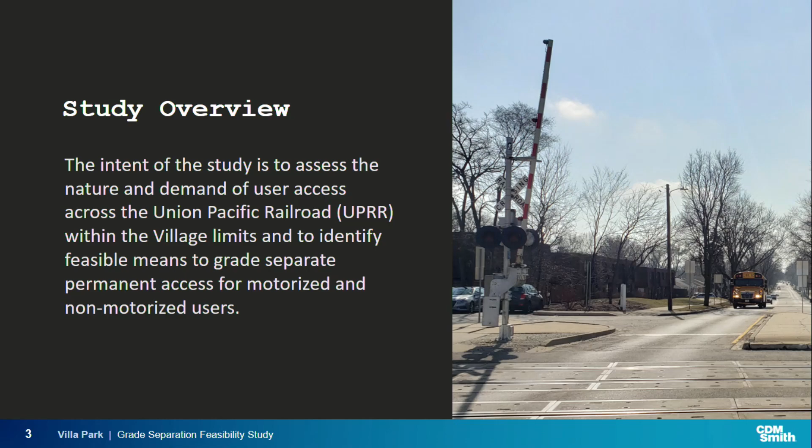So we kind of talked about the study overview already, so thank you, Mike. And then we'll jump right into the schedule.

Back in April, we did bring to the Committee of the Whole a presentation of the feasibility study, starting with a kickoff meeting. We also opened up the public survey at that time. We then met with Villa Park representatives, stakeholders internal to Villa Park, and staff, and talked over some of the results, not only of the study, but a little bit of the impacts of some of the alternatives. So we had a little bit of internal discussion before we really got moving on the concept development. We've been refining the concepts over the summer, and now here we are to talk with you, get some final input, and then incorporate that into our final recommendations.

So, as part of the feasibility study, we really are looking to understand what's feasible, recognizing best utility, recognizing major needs, some of the issues, environmental issues, and so we'll walk through some of those at a high level.

One of the first things we did was look at the local traffic profile. There were 4 alternatives, or 4 grade crossing locations, we looked at: Westmore being one, although it's not currently a grade crossing at this time. It was an opportunity for us to see if that had any more benefit than the other locations, also shown here: Addison, Ardmore, and Villa Avenue.

So with Westmore, obviously not a local crossing, it has a two-lane cross-section on the north and south of the tracks.

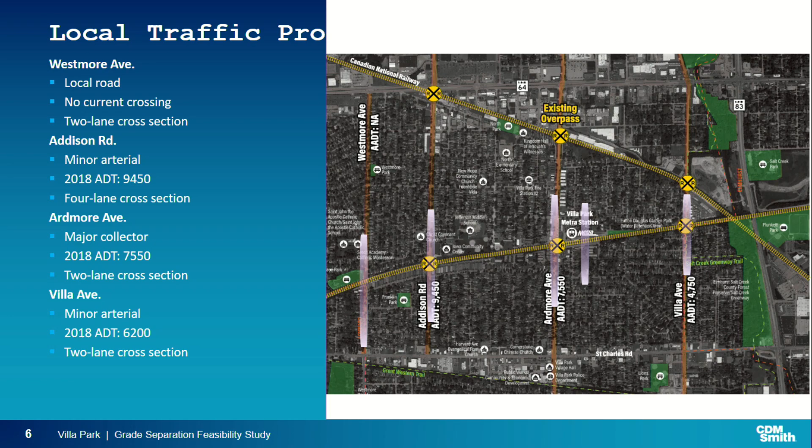But Ardmore also had a little bit lower traffic than Addison, a 2-lane section, again, which makes sense. And then we looked at Villa Avenue as well, all part of our scope here. Villa had the lowest average daily traffic of any of the crossings we evaluated.

So as we understood where the traffic sat, we started looking, no pun intended, at the train crossings and the average hours of delay at each of these locations. This is average delay per weekday. Back in 2018, we started looking at this information.

There's over 100 trains per day in 2018, 59 Metra trains in 2018, but it's still right about the same right now that you're experiencing in 2023.

With that, we're looking at almost 160 hours of delay for motorists overall, not per motorist, but total hours of delay. For Ardmore, it's 130 hours a day, and Villa, again with the lowest traffic volumes, has the lowest hours of delay. But still pretty substantial delay, which I'm sure you've all experienced at some point driving through the village.

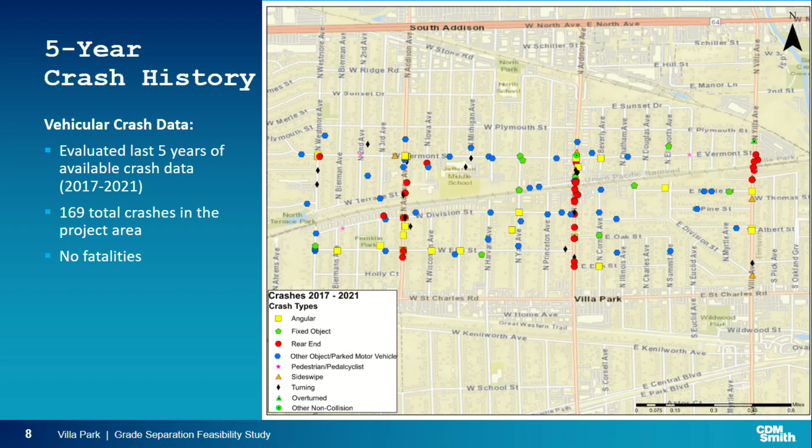We also took a look at the environmental overview. We recognize that there's really no critical habitat for any threatened or endangered species within Villa Park. We did not see any historic or architectural resource that we need to be concerned with, and there was a low risk of flooding at the crossing locations.

What we did see were some potential environmental issues that may come up if there were an improvement. At Addison, there's public space, the Iowa Community Center, and that property is considered open parkland. So if we were to do any impact or improvements there and need to take some of that property, we'd have to work with a mitigation strategy to accommodate that improvement.

At North Terrace Park, also that 4(f) designation over at Westmore, if that was going to be an option, we'd have to look into some sort of mitigation if there was going to be a real impact to that property.

And then we did recognize that there is a LUST site, a leaking underground storage tank, around the Ardmore crossing. Again, something to be mitigated, just something to be aware of as you move into the next phase. But no red flags. There was nothing obvious saying this is not a feasible alternative at any of these crossing locations, so that's good.

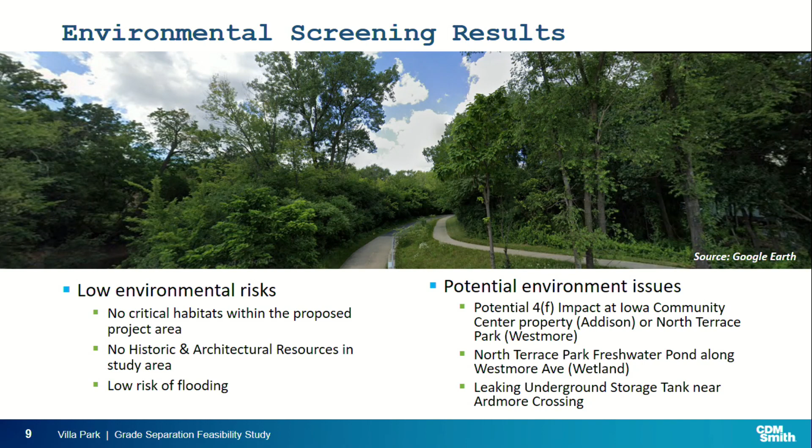So we talked a little bit about public engagement. We met here before in April. We worked with village stakeholders internally in May, and now we're back again to present the rest of the findings. From that online survey we discussed here, we got 150 responses, which is really pretty good in my mind for some of the public engagement I've seen with these studies.

Ooh, I keep hitting buttons.

From that, we asked a series of questions, and what we really came up with was that top of mind is response times. Emergency response times is a major issue involved with not having a grade separation in Villa Park. Reliable travel times, safety, and again delay, both pedestrian and motorized travel, was obviously something we would have thought we'd see, but it showed in the results. And then a common theme was improved access, both for community destinations as well as north and south travel.

And then we did hear pretty resoundingly that pedestrian crossings are really key for many people, particularly riding Metra trains. There were some issues with trains loading or unloading on opposite sides of what they're anticipating. Once the train comes, there's no option to be able to cross over. So people were saying they'd considered, or typically drive over to Elmhurst or another Metra station to have that reliability, recognizing they'd have an opportunity to cross tracks should that switch.

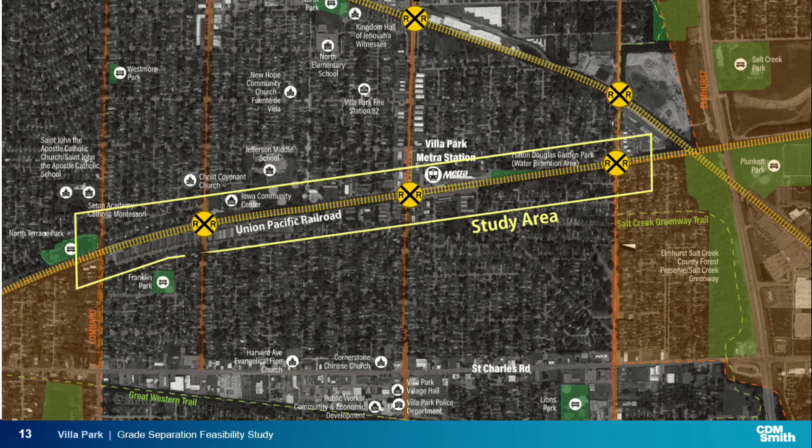So once we started looking more at the alternatives, I'm showing you this map just to show again, Westmore was under consideration. After the meeting we had with the village staff at the internal stakeholder meeting, it was decided that Westmore, not being an existing at-grade crossing now, really didn't make too much sense to carry forward. So it was dismissed from consideration moving into an overpass or underpass alternative. So then we're left with the three major crossings at Addison, Ardmore, and Villa. I'll note, because we did do motorized and unmotorized, and I'll get into this, not necessarily separating a grade or pedestrian-only grade separation at Ardmore, but recognizing that the Metra station made more sense to provide that pedestrian-only underpass. So I'll put that out there, but again, the three crossings we're looking at.

So we'll start talking about the motorized alternatives and some of the considerations. Obviously, overpass and underpass are really our options for the locations. Keeping in mind, underpasses typically tend to be more expensive, particularly under railroad crossings, mostly because that structure for the railroad bridge is so significant that it's just more costly to make that type of improvement. There are some pictures on the right side you can see there, the overpass on top and the underpass at Belmont. Underpasses also, though, typically have less impact to properties and access because you don't need that much clearance to get underneath the railroad bridge for the vehicular traffic.

It's usually around 14 feet for clearance. You've seen the clearance signs above bridges a lot of times, 14, 6, 15 foot. So there's not as much grade differential you need to get underneath that to get that clearance. Unfortunately, or just a matter of fact, when you have the overpass options, the overpass clearance requirements over our railroad tracks can be up to 25 feet, even 30 feet. So you really have to get that road up and over to allow for the appropriate clearance for the railroad or for the trains. That's where you'll start to see this, I'm just laying this out so you can keep it in mind as we look at some of these pictures coming up. And again, we're working with the railroad. I'm not sure how many of you have had interaction with railroad and trying to work with them, but they have long lead times on coordination.

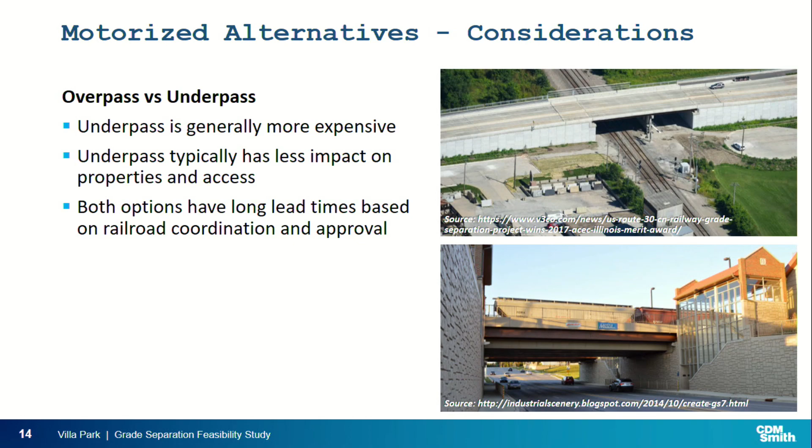So it's something to keep in mind if this is something you want to continue to pursue. Starting that coordination and that coalition building with the railroads, letting them know this is something that's being considered, is a really good idea. So putting that all together here.

Looking at the roadway sections, I mentioned it briefly in the traffic profile. At Villa and Ardmore, again, it's a 2-lane roadway. I know many of you know this. At Addison, it's a 4-lane cross-section. In the motorized alternatives, there will always be accommodation for bicycles and pedestrians for non-motorized travel along with that motorized crossing. So we'd always have some sort of a side path to allow for all modes to use that crossing.

When we get into the pedestrian only, I don't have an image up here, but we used a 10-foot walk path, which is pretty substantial. A typical sidewalk to be ADA compliant, Americans with Disabilities Act compliant, would be about 5 feet. So we're doubling the size of that just to be a little bit more conservative on any kind of impact that we would have with those underpasses or overpasses in the pedestrian. But again, something that we can start to refine as we move forward into the next phase.

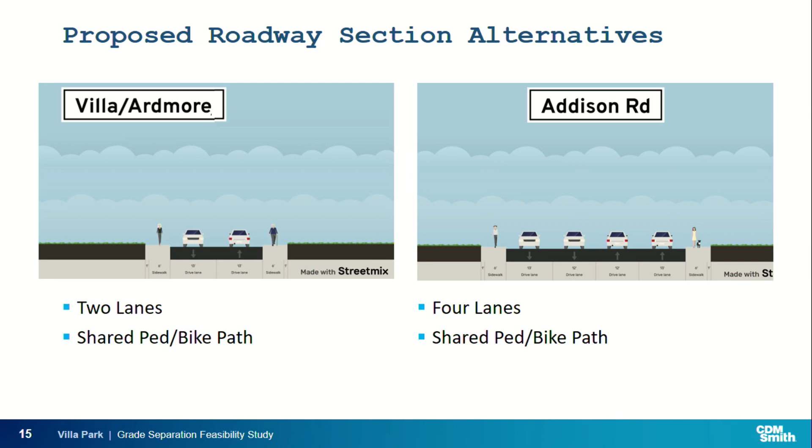So as we talk about motorized, again, these are the sections we're looking at. So we're going to start looking at the impacts and the benefits. On this next slide, again, motorized only here, with the accommodation of ped and bike. But I'm specifically talking about the grade separations for motorized vehicles.

I'm showing you this legend, and the legend's on each of the next slides, but I want to point out, impacted parcels does not mean that it's a property take. It could just mean that we might need a little bit of right-of-way to put in a retaining wall. It might be an impact to the access. We may not touch the property at all, but once we block the access, now it's an impacted property. So when you see some red shaded parcels, it seems bold, but it's just a comparison between the underpass and overpass options at each of these crossings. So with that lead up, here's what you'll see.

So this is at Addison Road, again, motorized crossing. On the left side is the overpass, and again, I talked about that clearance we have to get over the railroad tracks, and so you can see where the roadway needs to take off to gain that elevation to get up and over the tracks. And again, the red is just an impacted property, not a take, or acquiring necessarily.

The blue dots are the access or driveway impact, and then the larger green dots reflect where we are impacting a road crossing, where we would have to cul-de-sac or something like that in order to allow this alternative to be put in place. Again, this is a very high-level graphic. It's just more to get a sense of what we were talking about here.

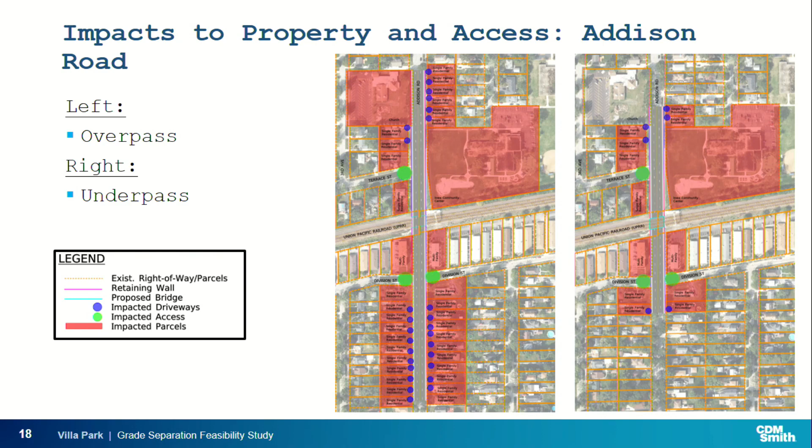Any other questions while we're here? No? Okay.

I'm going to keep my hands behind my back.

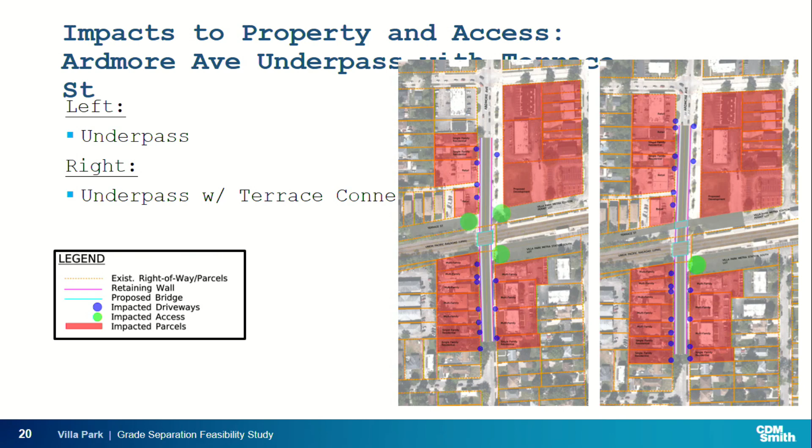Less driveways are impacted. At Ardmore, because there is Terrace Street on the north side, we did do a separate evaluation just to take a peek at that. Again, here you'll see on the left is the underpass, same as what we saw on the right side on the previous graphic. But here you can see if we kept the, and I apologize, the formatting here has not translated well, but it does say the terrace connection.

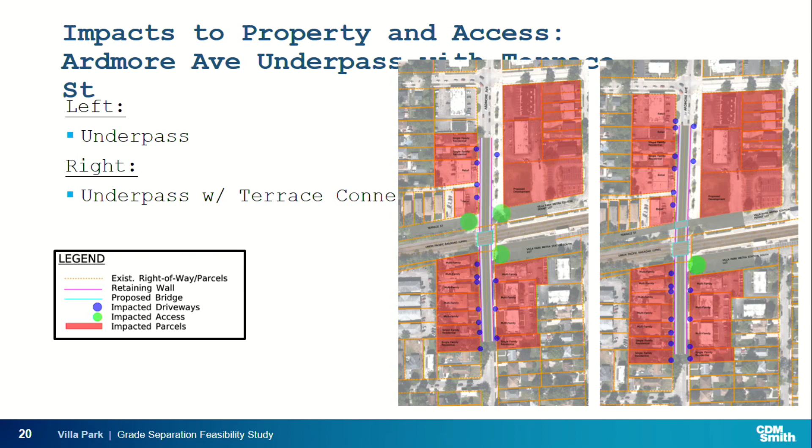And so we provided an additional structure for Terrace on the north side of the tracks, allowing that access to be maintained. So that structure, or where you're able to come back up underneath the overpass, is pushed a little bit further north, so you see a little bit more impact to the properties on the far north there. But it would be an option that might maintain some access for the proposed development in the northeast quadrant there. Just something that was brought up during our stakeholder meeting, so we kind of investigated at least for impact.

And then moving to Villa here, currently Villa has a pretty decent elevation difference already. The roadway already rises to meet the crossing location, the railroad tracks there. There's already a bit of a retaining wall. So in order to provide the overpass on the left, that elevation gain really comes back pretty far. So it's a relatively intense impact to Villa Park properties, both north and south.

And then on the east side, you'll see that there's the underpass option as well. Again, much less impact, but again, we're closing that access on Beach that does provide access to many of those single-family properties there on the southwest quadrant. So, are there any questions on the motorized before I move on to the non-motorized?

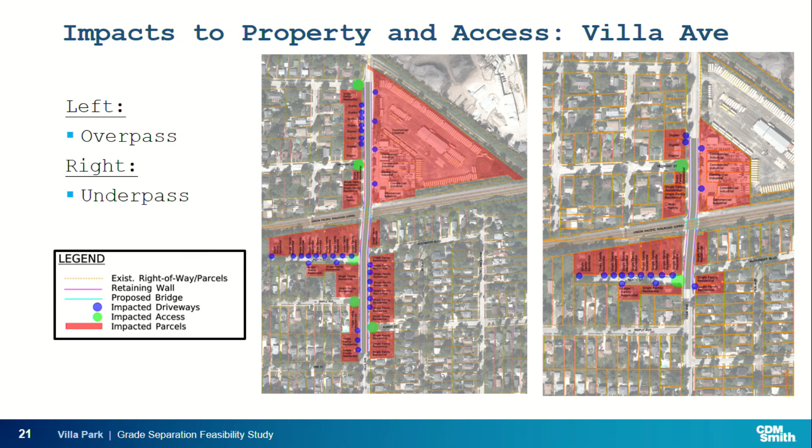There's only one way to get to Beach right now? Is that correct? It's not a dead end? Correct. It's a dead end? Beach is a dead end. Yeah, okay. Again, that's something that could be reviewed at another point, just to figure out maybe you can connect it somehow through to the next south street to provide that access there.

All right, then we're going to move into the non-motorized alternatives. A little bit different legend here. Same with the impacted parcels, same comment. It could just be that there's a bit of a take. So the picture showing here is really what I'm calling switchback ramps, where you really gain the elevation by switchbacking. Instead of having one long ramp, you just switch back. You can also provide stairs.

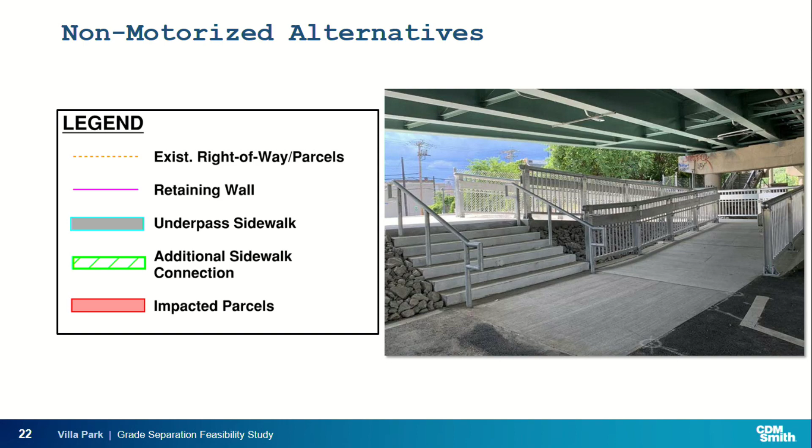For the examples you'll see here, we're using the switchback example to really show the impact to any of the parcels. Again, very high level, and just to give us a sense of what the impacts would be. We can tweak that. There could be a stairway and an elevator. That's a consideration that could move forward instead of having these ramps. When you see some of these impacts, you'll understand.

Again, even though it's a pedestrian and bike-only crossing location, you still have to gain the elevation clearance distance over the railroad. So again, you're still going up quite a way to get that access, and it may not be as attractive as using an at-grade crossing for pedestrians and bikes.

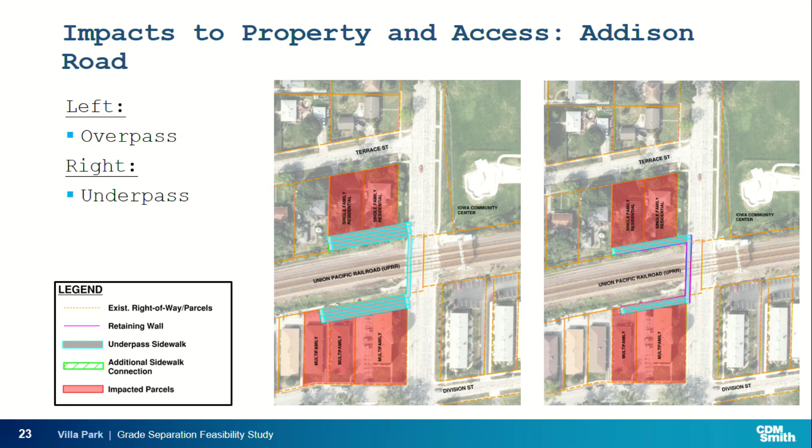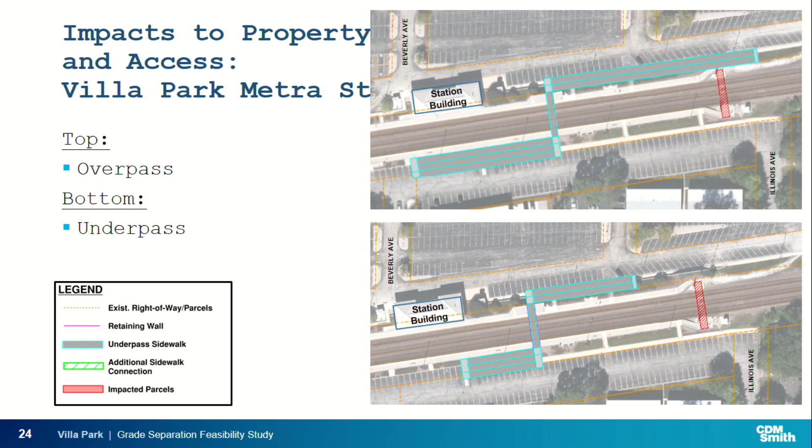As part of this, you'll see on the right side of the graphics, both underpass and overpass, something that would make this more attractive for funding options, for railroad approvals, is to eliminate the at-grade crossing currently there for the pedestrians by providing that underpass. So it's kind of a, hey, if we close this, it would eliminate an at-grade crossing. They may look more fondly upon that and maybe be a little more supportive of this effort. So just something to keep in mind.

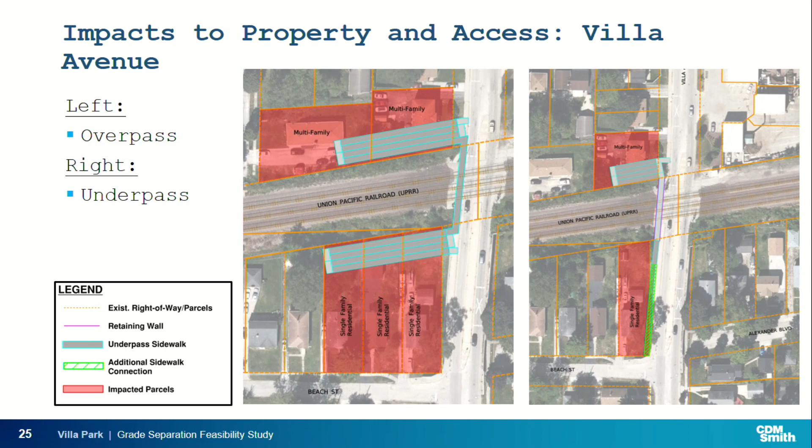Bless you. Excuse me. So for all of this, we started to base our evaluation criteria not only on some of the things that we looked at for the existing conditions, like the environment, the traffic, some of the crash data, but we also took into consideration what we heard from the survey, and also what we had heard with the stakeholder meeting with the Villa Park internal stakeholders.

So we looked at business impacts, we looked at some of the on-street parking impacts in particular. Utility impacts are an issue, makes the project a bit more expensive when you start having to relocate utilities. Obviously, cost is a big factor here, more for just the planning and trying to understand where funding opportunities may lie. And then also even potential railroad acceptance. So just all kinds of things that we considered.

We kind of summarized it, I'll walk through the bullet list. In the end, we put it to a color-coded where these things lie, a little bit easier to digest, but I'll run through these. We talked about it a little bit with Addison. This had the highest daily traffic volume, so you'd be accommodating more traffic if we were to grade separate that location. Also has the highest recorded delay.

It looks good on grant applications to show that it's got that delay, but to be honest, we have a lot of grade crossings in the Chicagoland area, and our delay is a lot higher than a lot across the nation. So all of these are very high delay relatively, competing for dollars at the Federal Railroad Administration level.

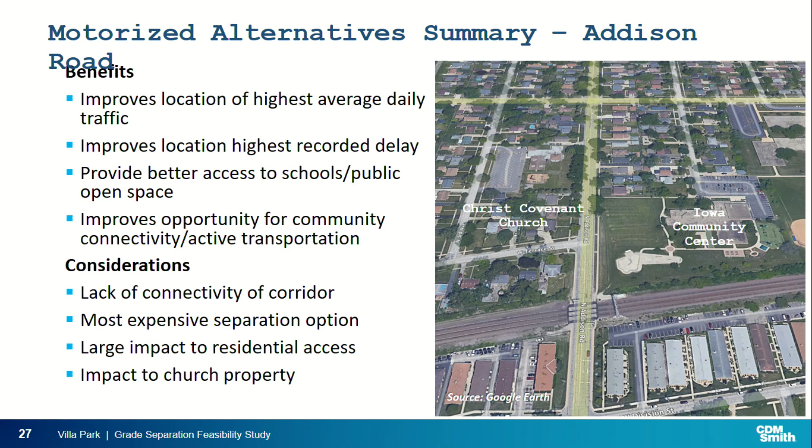It's also one of the most expensive grade separation options just because it is that 4-lane section. Either way, if you go over or under, it's just a larger cross-section that you need to accommodate for infrastructure. This also has a large impact to residential access, more parcels in particular than, say, the Ardmore option. And there may be impact to the church property. Again, just something to be considering.

We look at Ardmore, there is that connectivity from North Avenue to Roosevelt on the south. It's more centrally located in Villa Park. There's an existing grade separation to the north here as well, which allows a little bit more reliability for EMS. While that north crossing may not be blocked as much as we're experiencing here on the UP line, it still shows a positive benefit for emergency response times when you start providing that story to funding givers.

And then obviously the proximity to the Metra station may be a benefit here. Again, with the issues of trains on either side, even being confused as to which side you're supposed to board on, maybe having that motorized underpass there would benefit, maybe even bring some economic development.

I talked about the emergency response, and then this also has the lowest parcel impact of any options, both the overpass and the underpass. There are some multifamily properties on the south side that, while it's only one parcel, there might be more impact to residents. So again, something to consider, kind of a balancing. There also might be some impacts to the development that's already planned for the Eco Terra on the northeast corner.

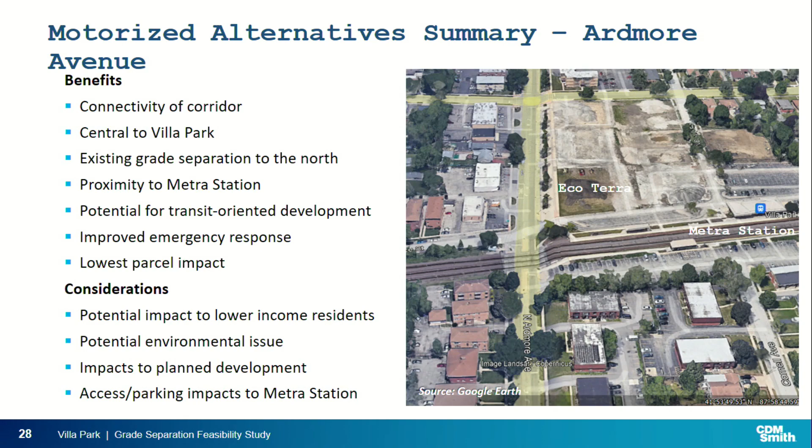Moving to Villa, again, we have the connectivity. There's a great opportunity here to improve the connection for the Salt Creek Trail. There's less benefit overall here, just when we look at how the Metra station is used and maybe even how Addison would be used with the access to the public space on the north side of the tracks. We did not take counts for the use of Salt Creek. That would be something that should be considered in the next phase to really understand that impact. But overall, with the criteria we looked at, this provided the least benefit of the alternatives.

There's also high residential impact here for over and under. Again, that grade elevation difference between the roadway and the current railroad, it takes a lot of effort to get up and over for an overpass. Here we also had the lowest daily traffic. And this also is pretty close to Illinois 83, already grade separated, so if you're looking for the benefit for emergency response, it may not have that much of an impact based on having the opportunity to take Illinois 83. And there were several more utility impacts at this location.

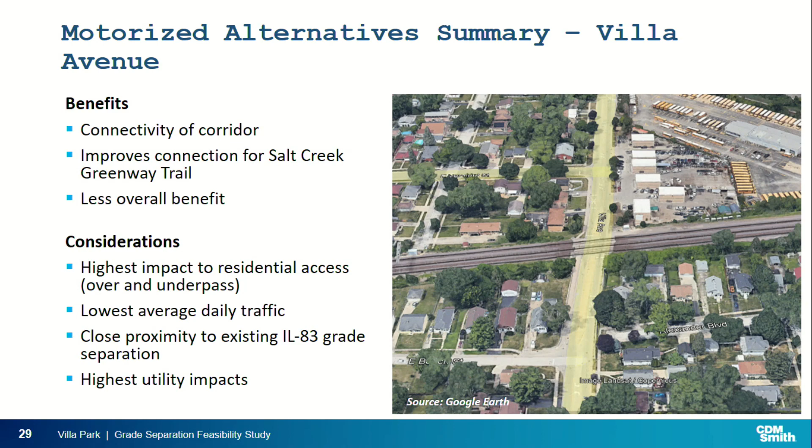All right, non-motorized. We're getting there, guys.

We're getting there. All right, so the non-motorized alternative summary here, we're talking about Addison Road. There is some benefit here if we provide a pedestrian and bike-only crossing, a grade separation here. Could provide better access to the schools and public open space, and again, that opportunity for more active transportation and connecting the community. Some considerations here. At Addison, the Metra blockages, so the 60 trains per day that are Metra, may not block this location as frequently as we see at Ardmore.

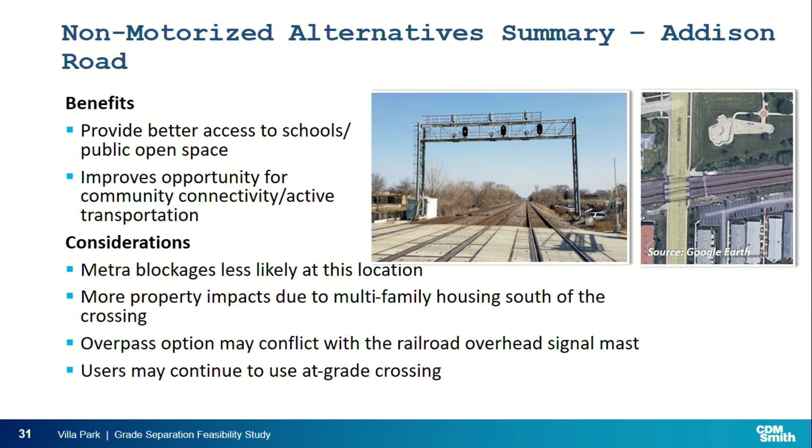And based on the length of those ramps to get over, at least what we're showing right now in the concept, users may still continue to use that grade crossing. So if you put the investment in there for an underpass or overpass and it's not being used, kind of defeats the purpose. So just again, some consideration.

Now when we look at Villa Park, there's a lot of benefit here. We talked about the riders being able to cross to one side or the other, depending on where the trains are. You've got the improved reliability, might attract more users to the station, might improve some economic development there, and then eliminates, at least for the pedestrian and the bike only, issues with Metra blockages there.

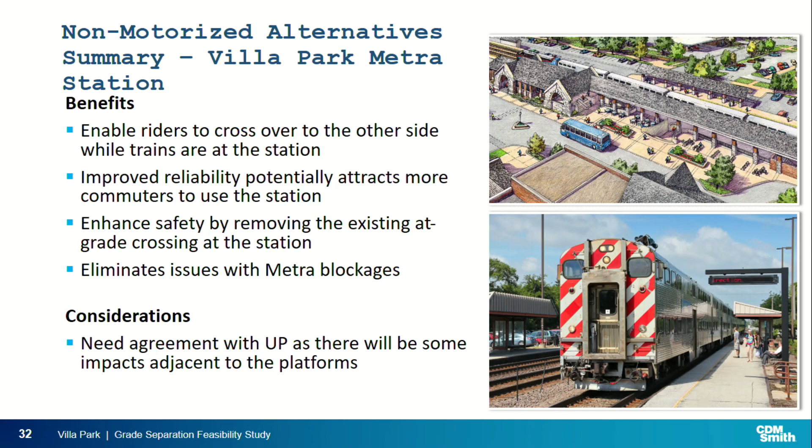And considerations here, there may be some impact to the platforms based on trying to provide that overpass or underpass. So again, you're going to have to be coordinating with the Union Pacific Railroad anyway, but just again, something more to talk with them about.

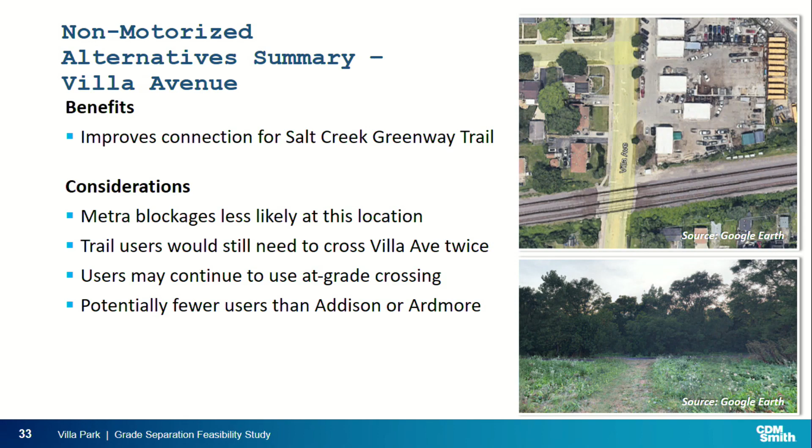And then Villa Avenue, again, we talked about the benefits. This would be, again, the pedestrian and bike only. Would improve the Greenway Trail connection. I know there's an ongoing study currently that's recommending the west side of the street to improve that. So there still would have to be some crossing of Villa Avenue for those trail users, even if we provided this underpass or overpass here. And again, potentially fewer users, something we would need to verify in the next phase of the project, as far as counts of pedestrians and bikes.

Okay, easy bunch here. All right, before I do that, you ready for our initial recommendations? If you couldn't tell by my tone of voice while I described these locations, based on what we've seen for really the utility and the benefit for motorized crossings, I think you get the best bang for the buck at Addison or at Ardmore. I don't know that there's enough there yet to really determine.

I think the next phase, which you would go into next, would be like the Phase 1 or the NEPA process, and that's really where those two alternatives would be explored in more detail. I know some of the concerns that we'd mentioned before were induced demand. I think that came up at the previous meeting of the whole. If we do provide a grade separation at one of the crossings, would that draw more traffic to that street to use the grade separation?

And that's something that would have to be explored. There'd have to be some projections, comparing it to other improvement projects in the region to see how that kind of induced demand or change in travel pattern would happen. But something to consider, and maybe that would be the deciding factor for Addison or Ardmore. All of these options would improve safety, and that would be recognized by the Illinois Commerce Commission, ICC. The railroad would appreciate some of these improvements as well, just eliminating some of their at-grade crossings.

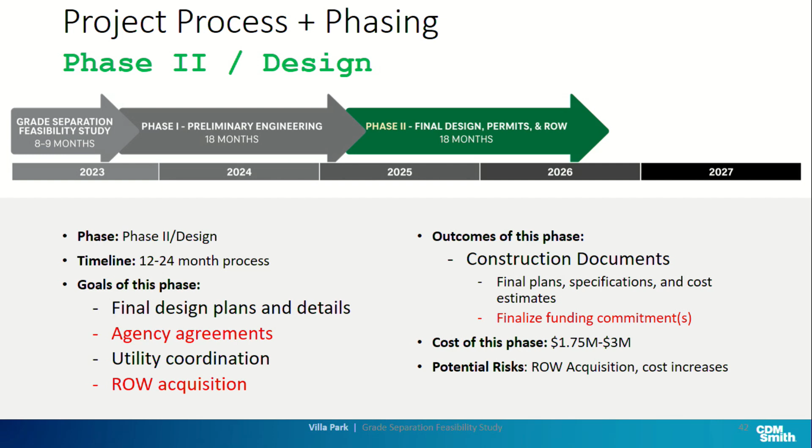Then we go into construction as the 3rd phase. This timeline is probably pretty aggressive, depending on what type of alternative you'd go with - this could be maybe 2 to 3 years for construction. Again, we have the cost of this phase as 20 to 25 million.

You saw some of those - this was originally what we'd shown back in April. Doing a little more investigation and looking at some projects regionally where they fell as far as cost for an over or underpass, those estimates are probably more in line: anywhere between 7 to 20 million for a pedestrian-only, ped/bike only, and then 20 to 60 for motorized. No extra zeros, just higher.

It seems a pretty aggressive timeline, because from what I've seen, it's usually you're looking upwards of 10 years from start to finish. Yeah.

So assuming you could get some of this coalition building, each of these phases we've kind of said around 2 years, so that's putting you at 6. Yeah, 10 probably wouldn't be too far off. Might as well go for it.

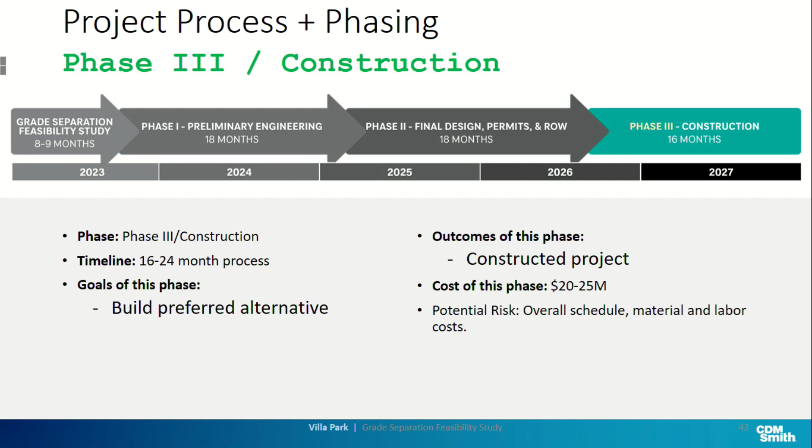It's like planting a tree, right? You don't plant it for the shade for yourself. Right, you plant it for the use and benefit of others. There you go, thank you.

Okay, any other questions or comments? Okay, so we'll wait for the final report from you, and then we'll go from there. Mike, then you can coordinate. Yes, I guess that's the last bit - if there's any comments or questions, feel free to pass them along to me, and we'll work with Jesse and our team.

I think part of that is we're going into the budget cycle here pretty soon, so that's some of the direction we're looking at. Is this something we wish to continue? And then at which pace? Do we want pedestrian? And then lastly, I think the initial recommendation is Addison or Ardmore.

Obviously there's really no great definable location - they both have their benefits and their cons. If one of those is kind of preferable to the board or to the trustees, that would be helpful information. Obviously this is a feasibility study, so we want it to be a productive study, a useful study, and that takes some input as well.

Last thing we want to do is get recommendations that aren't something the board wishes for that recommendation - they would like to see it somewhere else. So we want to make it useful.

Part of it comes down to, if we do the implemented phasing, we'd probably look at whether we do the NEPA for the entire site, say we do Ardmore. We may want to look at doing the NEPA for both motorized and non-motorized, just to get that whole corridor done. We do have to look at some timing, because some of the environmentals do have expiration dates now, those sort of things. So some of those numbers may be adjustable depending on if we just want to go only pedestrian or if we want to look at the whole site.